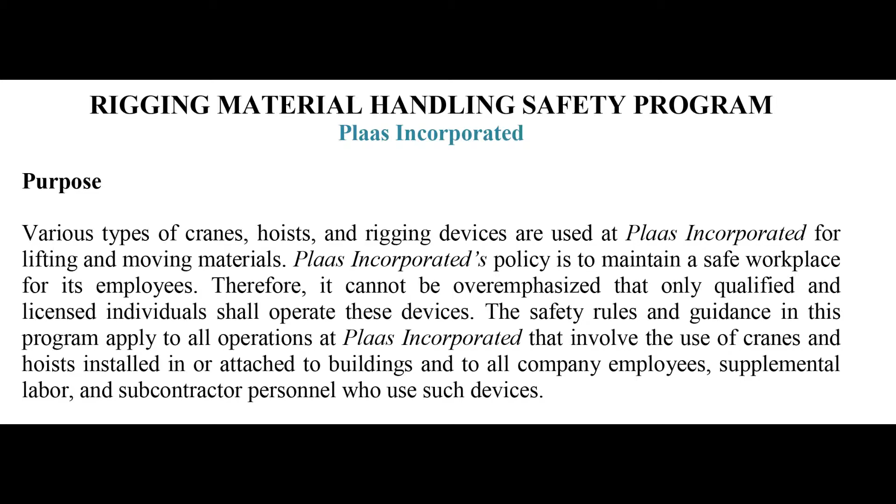use such devices. Responsibilities. The program administrator: this person is responsible for conducting training for all crane and hoist operators, issuing licenses to crane and hoist operators, periodically verifying monthly tests and inspection reports, interpreting crane and hoist safety rules

and standards. Foreman: these people are responsible for ensuring that employees under their supervision receive the required training and are certified and licensed to operate the cranes and hoists in their areas. Providing training for respective crane and hoist operators. This training must be conducted by a qualified designated instructor who is a licensed crane and hoist operator.

Evaluating crane and hoist trainees using the crane safety checklist and submitting the qualification request form to the safety office to obtain the operator's license. Ensuring that hoisting equipment is inspected and tested monthly by a responsible individual, and that rigging equipment is inspected annually.

Crane and hoist operators: these people are responsible for operating hoisting equipment safely, conducting functional tests prior to using the equipment, selecting and using rigging equipment appropriately, having a valid operator's license on their person while operating cranes or hoists, and participating in the medical certification program as required.

Engineering Maintenance Operations Department: these people are responsible for performing annual maintenance and inspection of all Plaas Incorporated cranes and hoists that are not covered by a program with maintenance responsibility, conducting periodic and special load tests of cranes and hoists, maintaining written records of inspections and tests, and providing copies of all inspections and test results to facility managers and building coordinators who have cranes and hoists on file.

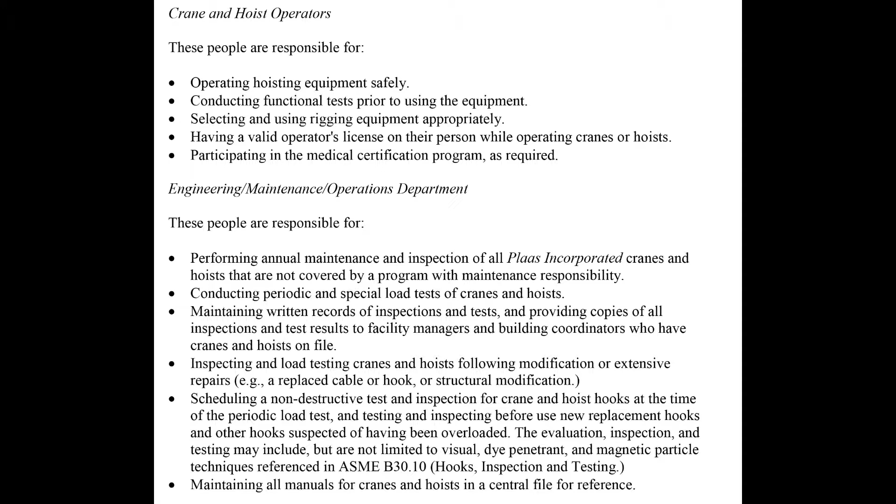The evaluation, inspection, and testing may include but are not limited to visual, dye penetrant, and magnetic particle techniques referenced in ASME B30.10, Hooks Inspection and Testing. Maintaining all manuals for cranes and hoists in a central file for reference.

Safe operating requirements. All workers who use any Plaas Incorporated crane or hoist shall have an operator's license. The company issues licenses for authorized employees who have been specially trained in crane and hoist operations and equipment safety. Crane and hoist operators. To be qualified as a crane and hoist operator, the candidate shall have received hands-on training from a licensed qualified crane and hoist operator designated by the candidate's supervisor.

Upon successful completion of training, the licensed crane and hoist operator and the candidate's supervisor will fill out and sign the qualification request form and crane safety checklist and send them to the safety office for approval. The candidate will be issued a license upon approval by the safety manager. Crane and hoist operators must renew their license every 3 years by satisfying the requirements described above.

Crane and hoist safety design requirements. Following are the design requirements for cranes and hoists and their components. The design of all commercial cranes and hoists shall comply with the requirements of ASME ANSI B30 standards and Crane Manufacturers Association of America standards, CMAA-70 and CMAA-74. All crane and hoist hooks shall have safety latches. Hooks shall not be painted or repainted if the paint previously applied by the manufacturer is worn.

Crane pendants shall have an electrical disconnect switch or button to open the mainline control circuit. Cranes and hoists shall have a main electrical disconnect switch. This switch shall be in a separate box that is labeled with lockout capability. Crane bridges and hoist monorails shall be labeled on both sides with the maximum capacity. Each hoist hook block shall be labeled with the maximum hook capacity.

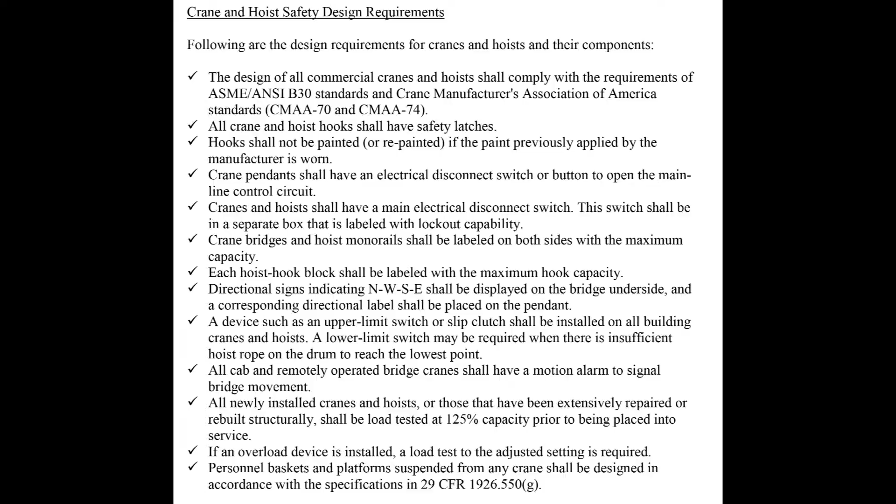Personnel baskets and platforms suspended from any crane shall be designed in accordance with the specifications in 29 CFR 1926.550(g). General safety rules. Operators shall comply with the following rules while operating the cranes and hoists. Do not engage in any practice that will divert your attention while operating the crane. Respond to signals only from the person who is directing the lift or any appointed signal person. Obey a stop signal at all times, no matter who gives it.

Do not move a load over people. People should not be placed in jeopardy by being under a suspended load. Also, do not work under a suspended load unless the load is supported by blocks, jacks, or a solid footing that will safely support the entire weight. Have a crane or hoist operator remain at the controls or lock open and tag the main electrical disconnect switch.

Ensure that the rated load capacity of the crane's bridge, individual hoist, or any sling or fitting is not exceeded. Know the weight of the object being lifted or use a dynamometer or load cell to determine the weight. Check that all controls are in the off position before closing the mainline disconnect switch. If spring-loaded reels are provided to lift pendants clear of the work area, ease the pendant up into the stop to prevent damaging the wire.

Avoid side pulls. These can cause the hoist rope to slip out of the drum groove, damaging the rope or destabilizing the crane or hoist. To prevent shock loading, avoid sudden stops or starts. Shock loading can occur when a suspended load is accelerated or decelerated and can overload the crane or hoist. When completing an upward or downward motion, ease the load slowly to a stop.

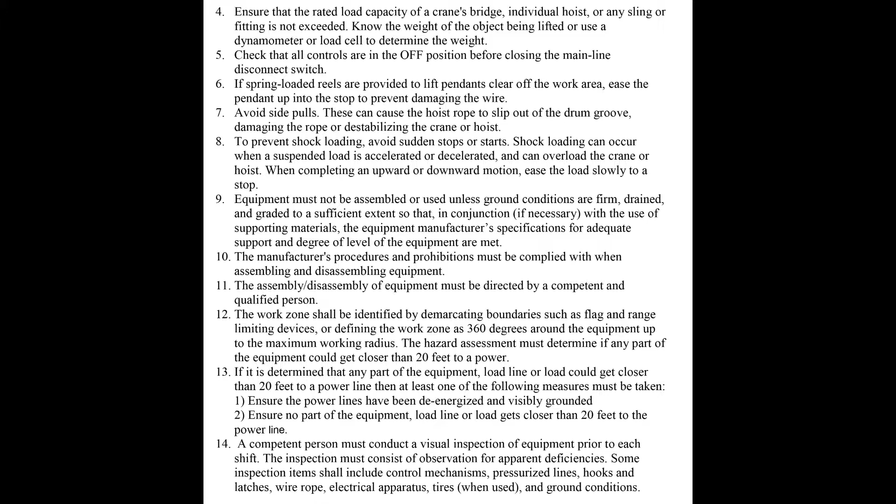A competent person must conduct a visual inspection of equipment prior to each shift. The inspection must consist of observation for apparent deficiencies. Some inspection items shall include control mechanisms, pressurized lines, hooks and latches, wire rope, electrical apparatus, tires when used, and ground conditions.

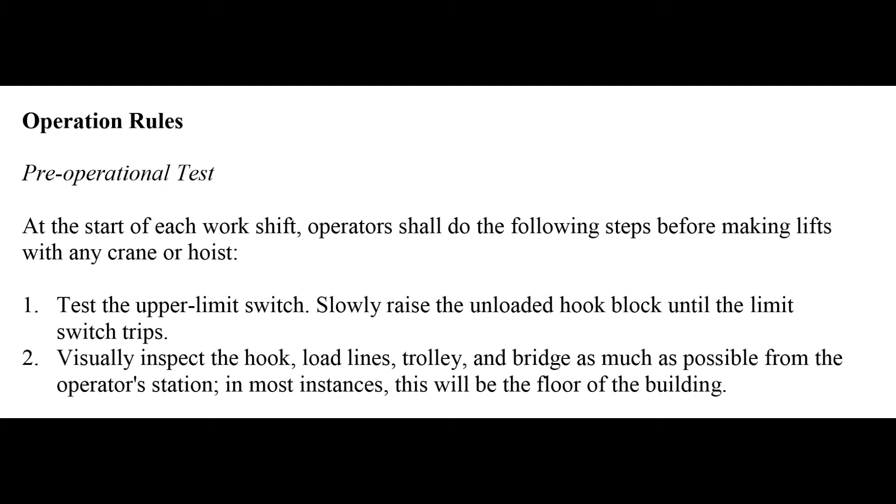Operational rules. Pre-operational test. At the start of each work shift, operators shall do the following steps before making lifts with any crane or hoist. Test the upper limit switch. Slowly raise the unloaded hook block until the limit switch trips. Number 2, visually inspect the hook, load lines, trolley, and bridges as much as possible from the operator's station. In most instances, this will be on the floor of the building.

If provided, test the lower limit switch. Test all direction and speed controls for both bridge and trolley travel. Test all bridge and trolley limit switches where provided if operation will bring the equipment in close proximity to the limit switches. Test the pendant emergency stop. Test the hoist brake to verify there is no drift without a load. If provided, test the bridge movement alarm. Lock out and tag out for repair any crane or hoist that fails any of the above tests.

Moving a load. Center the hook over a load to keep the cables from slipping out of the drum grooves and overlapping, and to prevent the load from swinging when it is lifted. Inspect the drum to verify that the cable is in its grooves. Use a tag line when loads must traverse long distances or must otherwise be controlled. Manila rope may be used for tag lines.

Plan and check the travel path to avoid personnel and obstructions. Lift the load only high enough to clear the tallest obstruction in the travel path. Start and stop slowly. Land the load where the move is finished. Choose a safe landing. Never leave suspended loads unattended.

In an emergency where the crane or hoist has become inoperative, if a load must be left suspended, barricade and post signs in the surrounding area under the load and on all four sides. Lock open and tag the crane's or hoist's main electrical disconnect switch. Whenever there is a safety concern, the operator must have the authority to stop and refuse to handle loads until a qualified person has determined that safety has been assured.

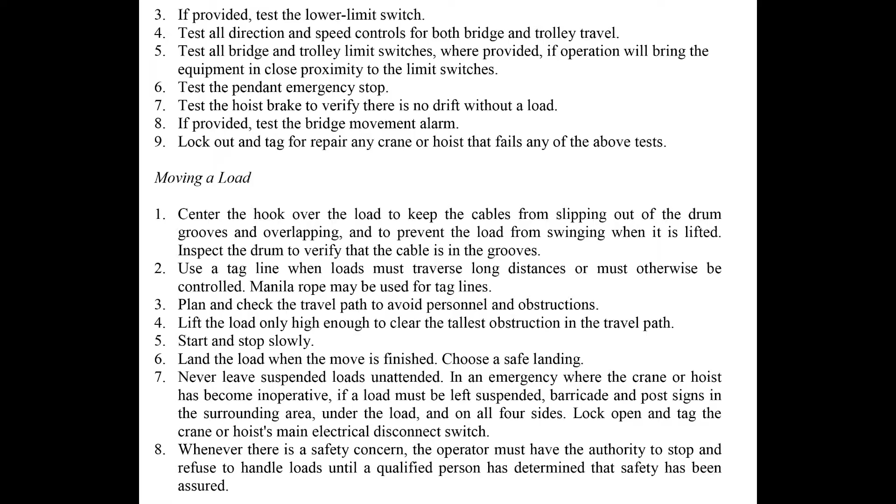Safety devices. Safety devices are required to be on all equipment and must be in proper working order before operations begin. If any of the devices are not in proper working order, the equipment must be taken out of service and operations must not resume until the device is working properly again. Examples of safety devices may include crane level indicator, boom stops, jib stops, foot pedal brake, locks, horns, etc.

Manufacturer procedures. All manufacturer procedures applicable to the operational functions of equipment, including its use with attachments, must be complied with. Operator procedures. The operator shall have access to procedures applicable to the operation of the equipment. Procedures include rated capacity, load charts, recommended operating speeds, special hazard warnings, instructions, and operator's manual.

Modifications. The manufacturer must approve all modifications and additions in writing. A registered professional engineer must be qualified with respect to the equipment involved and must ensure the original safety factor of the equipment is not reduced.

Parking a crane or hoist. Remove all slings and accessories from the hook. Return the rigging device to the designated storage racks. Raise the hook at least 2.1 meters, 7 feet, above the floor. Store the pendant away from aisles and work areas or raise it at least 2.1 meters, 7 feet, above the floor. Place the emergency stop switch or push button in the off position.

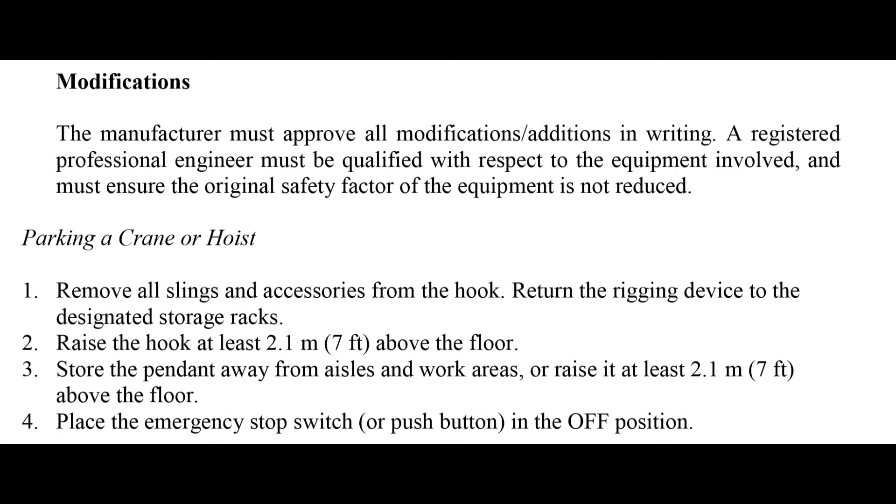Rigging. General rigging safety requirements. Only select rigging equipment that is in good condition. All rigging equipment shall be inspected annually. Defective equipment is to be removed from service and destroyed to prevent inadvertent reuse. The load capacity limit shall be stamped or affixed to all rigging components. Plaas Incorporated's policy requires a minimum safety factor of 5 to be maintained for wire rope slings.

The following types of slings shall be rejected or destroyed. Nylon slings with abnormal wear, torn stitching, broken or cut fibers, discoloration or deterioration. Wire rope slings with kinking or crushing, bird caging or other distortions, evidence of heat damage, cracks, deformation or worn end attachments, 6 randomly broken wires in a single rope lay, 3 broken wires in one strand of rope, hooks open more than 15% at the throat, hooks twisted sideways more than 10 degrees from the plane of the unbent hook,

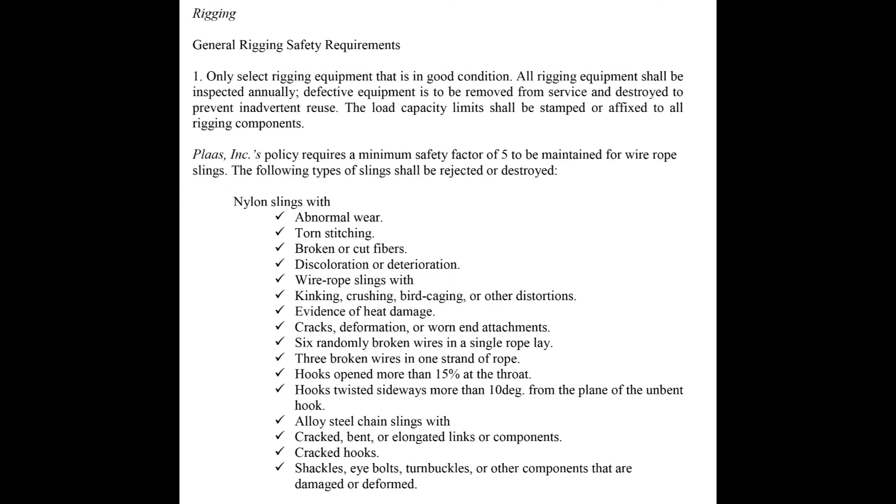alloy steel chain slings with cracked, bent, or elongated links or components, cracked hooks, shackles, eye bolts, turnbuckles, or other components that are damaged or deformed. 2. Rigging a load. Do the following when rigging a load. Determine the weight of the load. Do not guess. Determine the proper size for slings and components. Do not use manila rope for rigging.

Make sure that shackle pins and shouldered eye bolts are installed in accordance with the manufacturer's recommendations. Make sure that ordinary shoulderless eye bolts are threaded in at least 1.5 times the bolt diameter. Use safety hoist ring swivel eyes as a preferred substitute for eye bolts whenever possible. Pad sharp edges to protect slings. Remember that machinery foundations or angle iron edges may not feel sharp to the touch, but could cut into rigging when under several tons of load. Wood, tire, rubber, or other pliable materials may be suitable for padding.

Do not use slings, eye bolts, shackles, or hooks that have been cut, welded, or brazed. Install wire rope clips with the base only on the live end and the U-bolt only on the dead end. Follow the manufacturer's recommendations for the spacing for each specific wire size. Determine the center of gravity and the balance of the load before moving it. Initially lift the load only a few inches to test the rigging and balance.

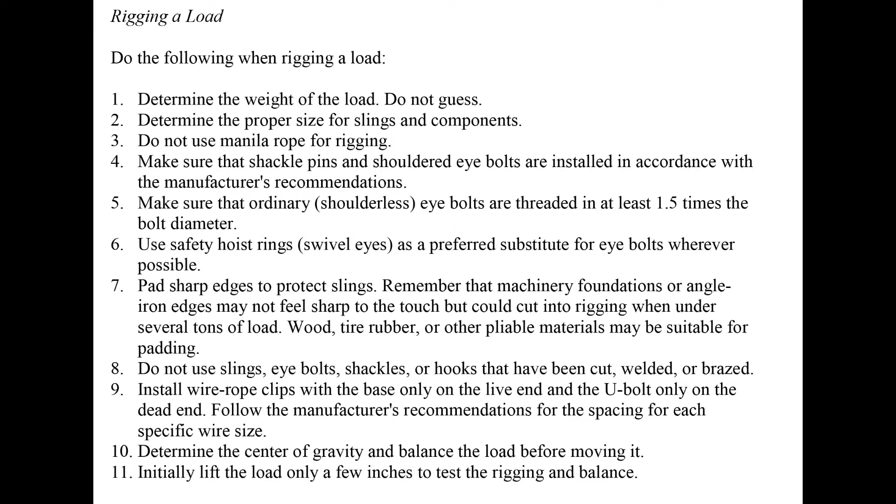Crane overloading. Cranes or hoists shall not be loaded beyond their rated capacity for normal operations. Any crane or hoist suspected of having been overloaded shall be removed from service by locking open and tagging the main disconnect switch. Additionally, overloaded cranes shall be inspected, repaired, load tested, and approved for use before being returned to service. Working at heights on cranes or hoists.

Anyone conducting maintenance or repair on cranes or hoists at heights greater than 1.8 meters (6 feet) shall use fall protection. Fall protection should also be considered for heights less than 1.8 meters. Fall protection includes safety harnesses that are fitted with a lifeline and securely attached to a structural member of the crane or building, or properly secured safety nets.

Use of a crane as a work platform should only be considered when conventional means of reaching an elevated work site are hazardous or not possible. Workers shall not ride a moving bridge crane without approval from the safety manager, which shall specify the following as a minimum. Personnel shall not board any bridge crane unless the main disconnect switch is locked and tagged open. Personnel should not use bridge cranes without a permanent platform catwalk as work platforms. Bridge catwalks shall have a permanent ladder access.

Personnel shall ride seated on the floor of the permanent platform with approved safety handrails, wear safety harnesses attached to the designated anchors, and be in clear view of the crane operator at all times. Operators shall lock and tag open the main or power disconnect switch on the bridge catwalk when the crane is parked.

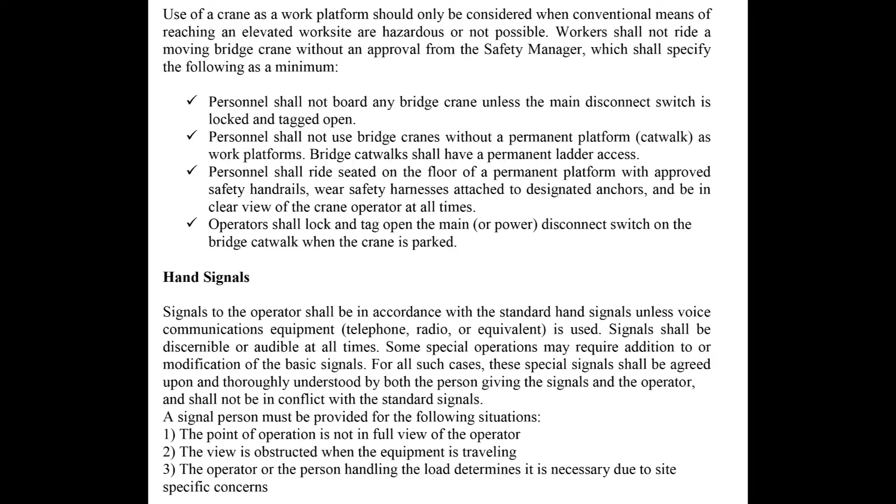A signal person must be provided for the following situations. The point of operation is not in full view of the operator. The view is obstructed when the equipment is traveling. The operator or the person handling the load determines it is necessary due to site-specific concerns.

Inspection, maintenance, and testing. All tests and inspections shall be conducted in accordance with the manufacturer's recommendations. Monthly tests and inspections. All in-service cranes and hoists shall be inspected monthly and the results documented. Defective cranes and hoists shall be locked and tagged out of service until all defects are corrected. The inspector shall initiate corrective action by notifying the facility manager or building coordinator.

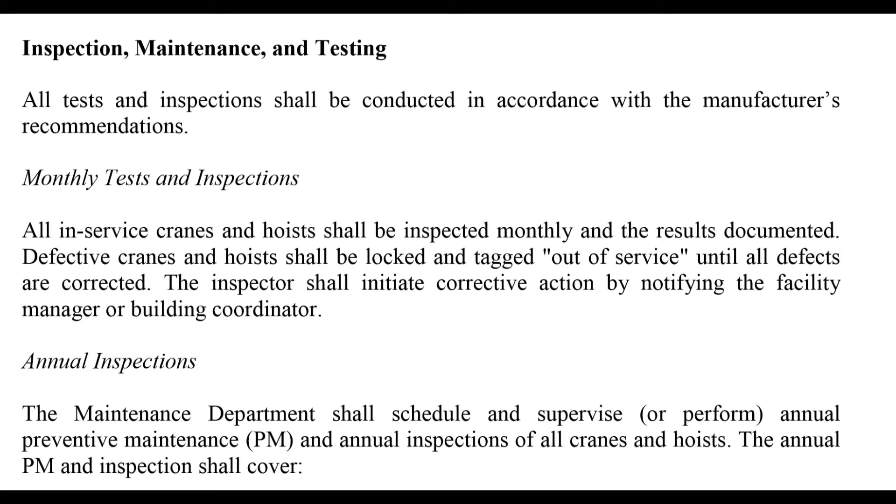Annual inspections. The maintenance department shall schedule and supervise or perform annual preventative maintenance, PM, and annual inspections of all cranes and hoists. The annual PM and inspection shall cover hoisting and lowering mechanisms, trolley travel or monorail travel, bridge travel, limit switches and locking and safety devices, structural members, bolts or rivets, sheaves and drums, parts such as pins, bearings,

shafts, gears, rollers, locking devices, and clamping devices, brake system parts, linings, pawls, and ratchets, load, wind, and other indicators over their full range, gasoline, diesel, electric, or other power plants, chain drive sprockets, crane and hoist hooks, electrical apparatus such as controllers, contactors, limit switches, and push-button stations, wire rope, hoist chains.

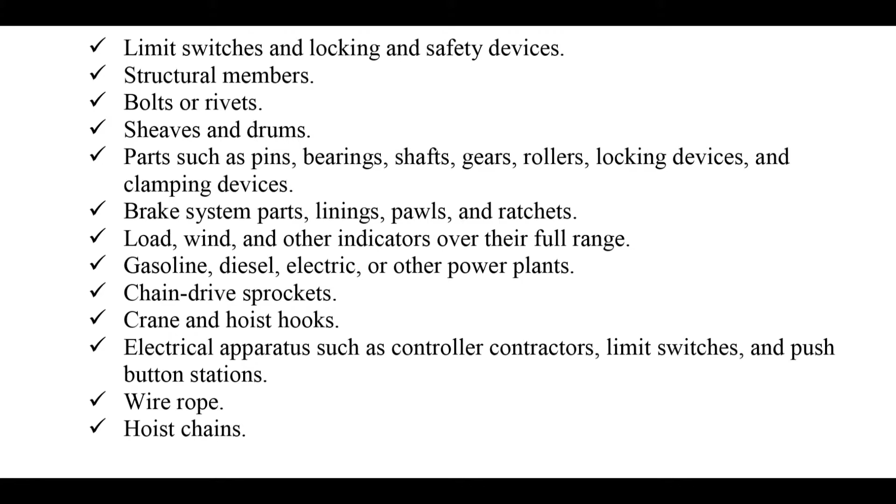Load testing. Newly installed cranes and hoists shall be load tested at 125% of the rated capacity by designated personnel. Slings shall have appropriate test data when purchased. It is the responsibility of the purchaser to ensure that the appropriate test data are obtained and maintained. Re-rated cranes and hoists shall be load tested to 125% of the new capacity if the new rating is greater than the previous rated capacity.

Fixed cranes or hoists that have major modifications or repairs shall be load tested to 125% of the rated capacity. Cranes and hoists that have been overloaded shall be inspected prior to being returned to service. Personnel platforms, baskets, and rigging suspended from a crane or hoist hook shall be load tested initially and then retested annually thereafter or at each new job site.

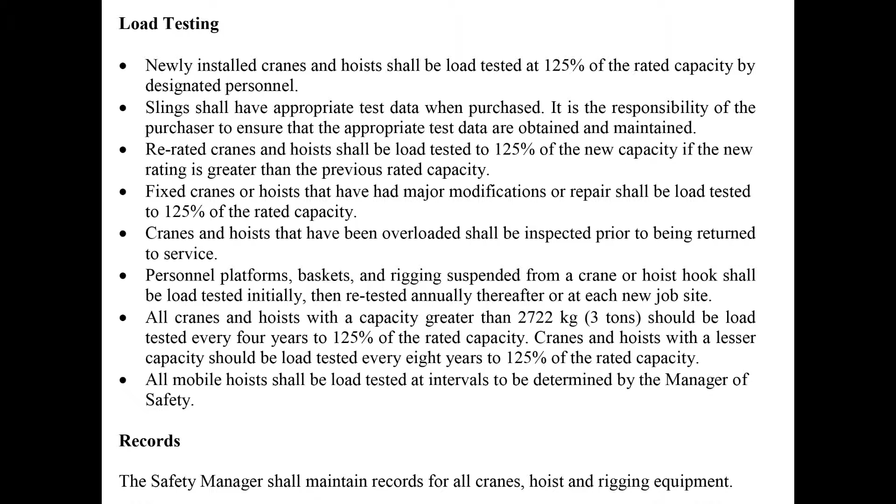All cranes and hoists with a capacity of greater than 2,722 kilograms (3 tons) should be load tested every 4 years to 125% of the rated capacity. Cranes and hoists with a lesser capacity should be load tested every 8 years to 125% of the rated capacity. All mobile hoists should be load tested at intervals to be determined by the manager of safety. Records. The safety manager shall maintain all records for cranes, hoists, and rigging equipment.